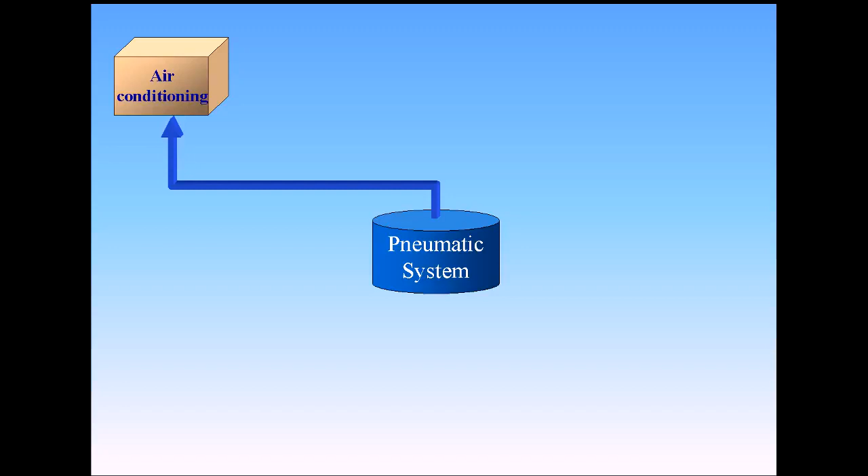The A320 pneumatic system supplies high-pressure air for air conditioning, wing anti-icing, water pressurization, hydraulic reservoir pressurization, and engine starting.

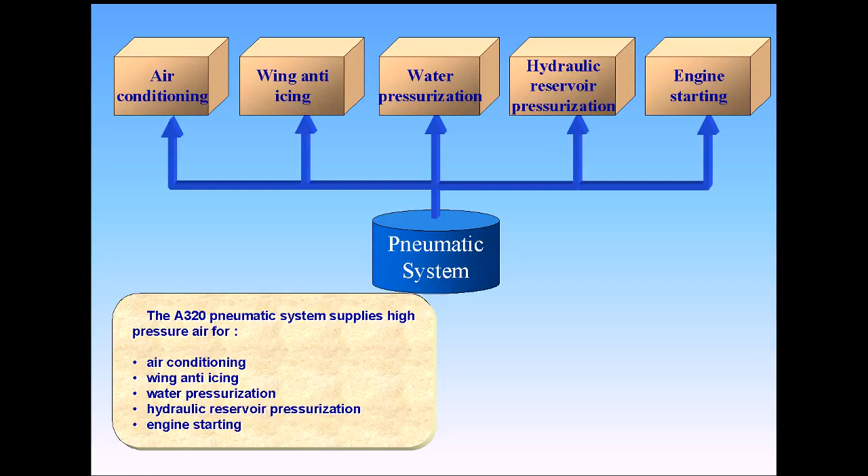High-pressure air can be supplied from three sources: the engine bleed system, the APU, and an external high-pressure ground power unit.

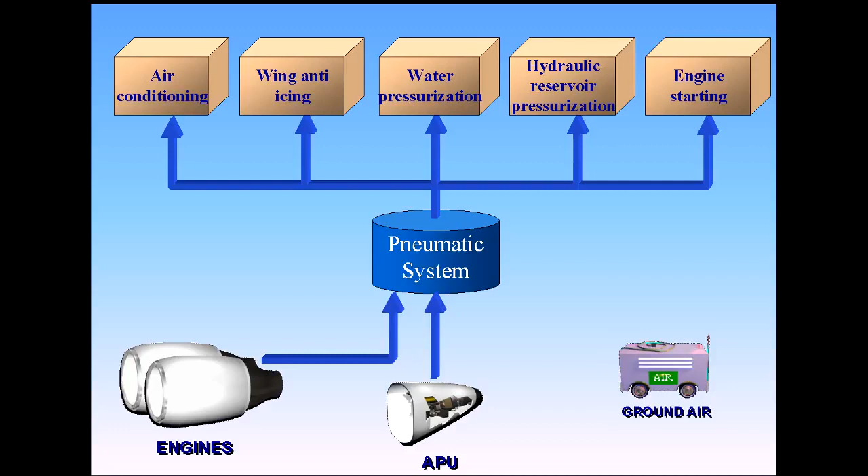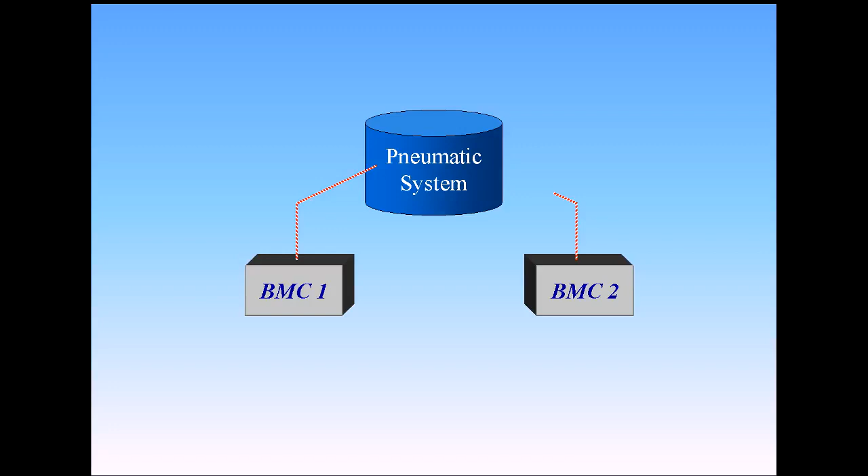The pneumatic system is controlled and monitored by two bleed monitoring computers, BMCs. There is one bleed monitoring computer for each engine bleed system. Both bleed monitoring computers are interconnected, and if one fails, the other takes over most of its functions.

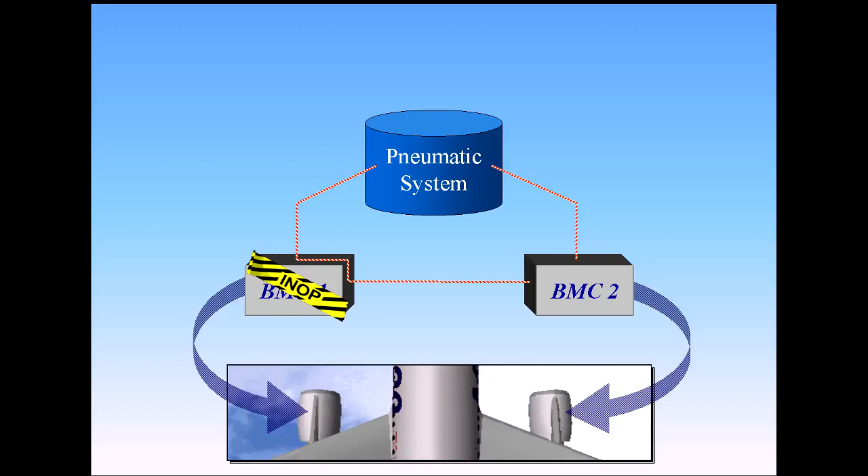There are air leakage detection loops installed in the vicinity of the hot air ducts in the fuselage, wings, and pylons. If a leak is detected, a signal is sent to the bleed monitoring computer, which automatically isolates the affected area. Bleed monitoring computer number 1 protects the left wing, number 1 engine, and the APU.

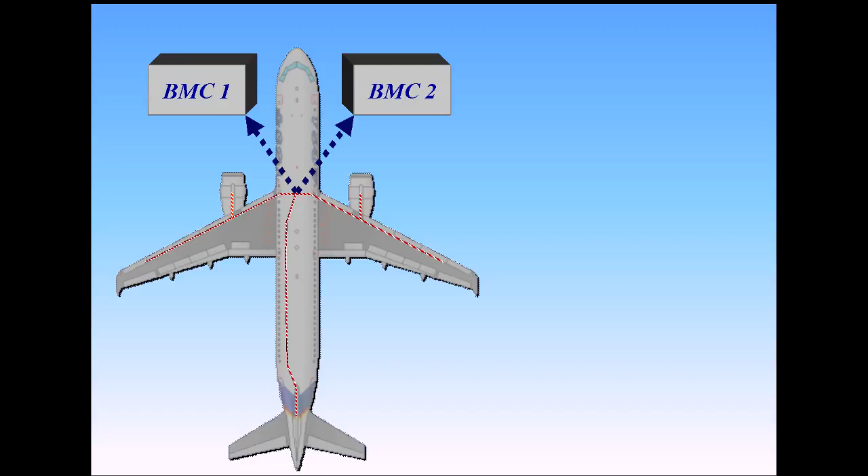Bleed monitoring computer number 2 protects the right wing and the number 2 engine. Should number 2 bleed monitoring computer fail, number 1 will take over all its functions, except for the pylon. Should number 1 fail, number 2 will protect all but the number 1 pylon and the APU.

Air is bled from two compressor stages of the engine: the intermediate pressure (IP) port and the high pressure (HP) port.

There is a high-pressure valve which can cut off bleed air from the high-pressure port. It is automatically controlled by the system.

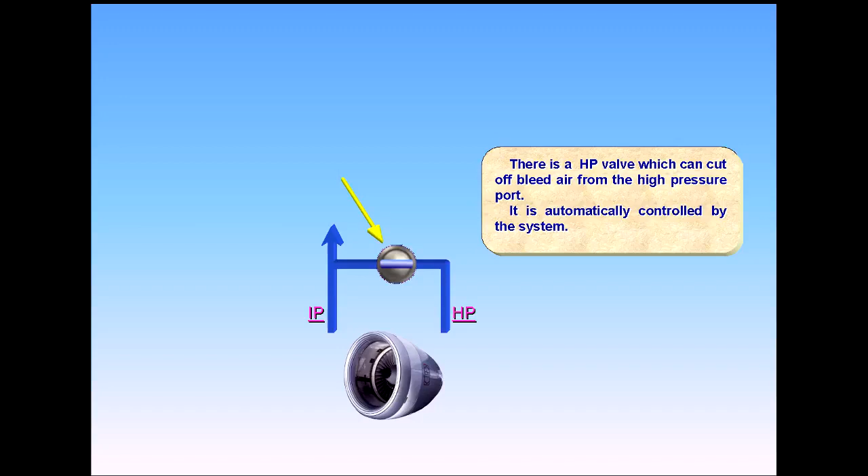The high-pressure section, HP, is only used when there is insufficient pressure from the intermediate output, IP, that is, when the engines are at idle. Once the engine speed is high enough, the IP intermediate pressure is sufficient and the high-pressure HP valve closes.

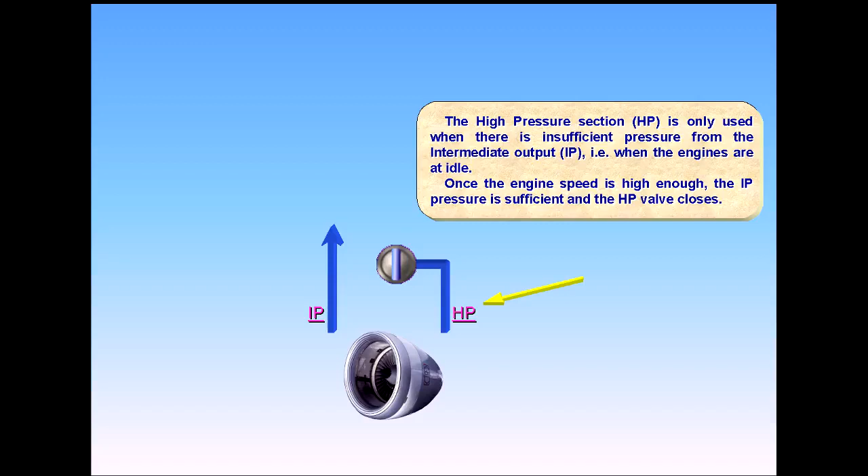The air extracted from the compressor then goes to a bleed valve, which acts as a shutoff and pressure regulating valve.

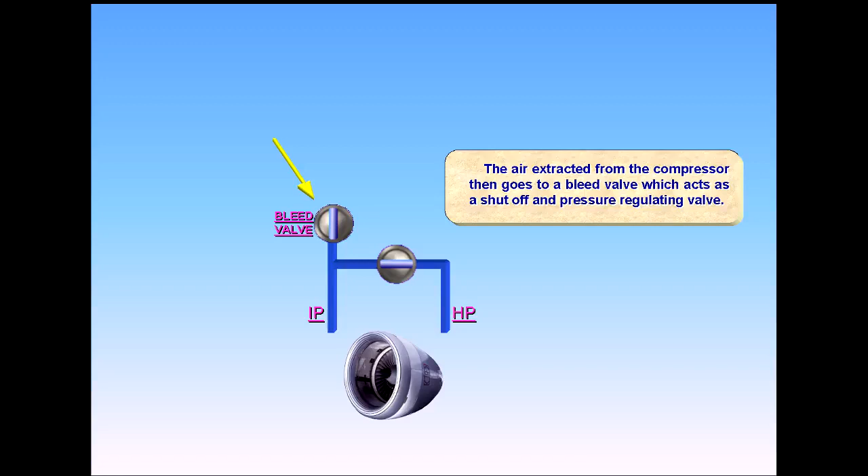Since the temperature of the bleed air is high, it passes through a pre-cooler before being distributed to the users. The pre-cooler uses cool air from the engine fan to regulate the temperature.

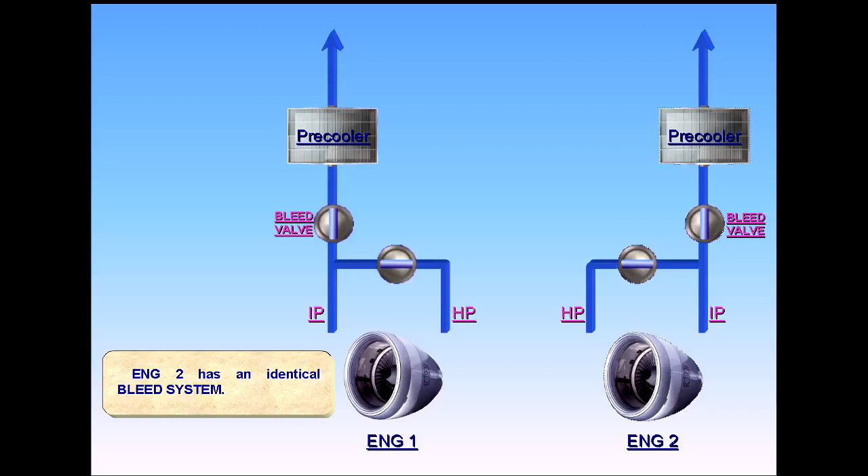Engine 2 has an identical bleed system. Both systems are connected by a cross-bleed duct. A cross-bleed valve permits their interconnection or isolation.

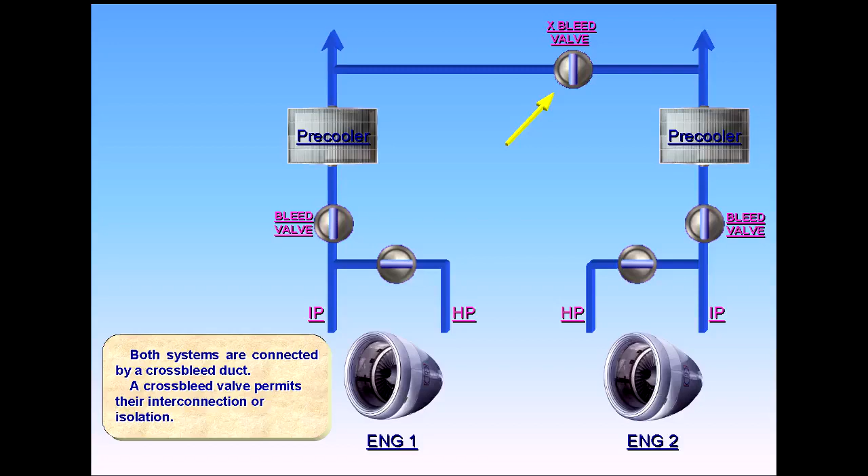The APU can also be used for bleed air supply. This is usually done on the ground for air conditioning and for engine start. However, APU bleed air is also available in flight.

APU bleed air is controlled by the APU bleed valve, which operates as a shutoff valve. Should the APU not be available, a high-pressure ground power unit can be connected.

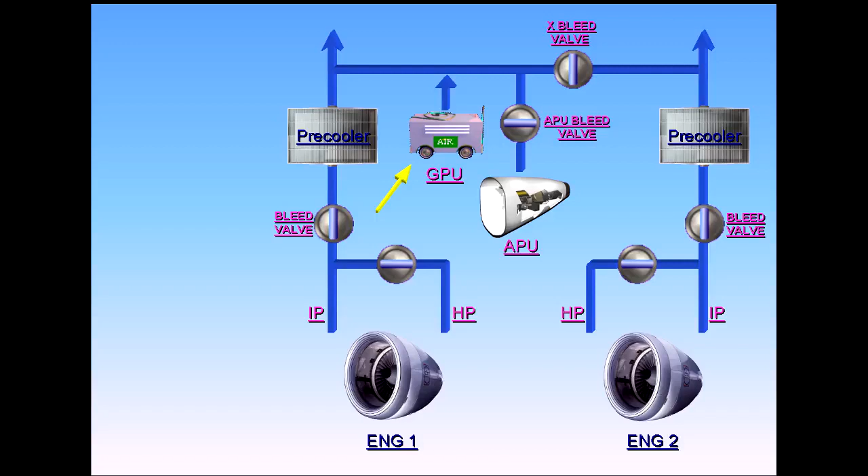This completes the pneumatic system. We will now show you how system information is displayed to the pilots.

Information on the pneumatic system is displayed on the lower part of the ECAM bleed page. Note, we have shaded the upper part of the ECAM bleed page because it is related to the air conditioning chapter. This will be covered in a later module.

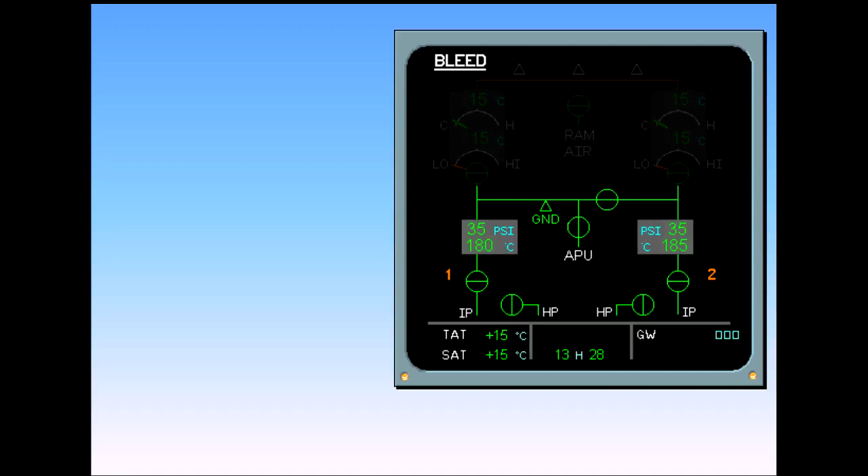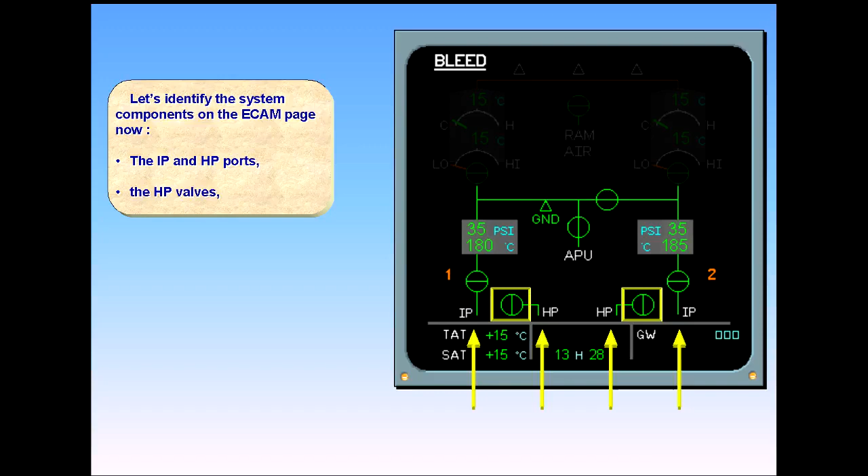Let's identify the system components on the ECAM page now: the intermediate pressure and high pressure ports, the high pressure valves, the engine bleed valves, the pre-coolers, the APU bleed valve, the cross-bleed valve, and the high-pressure ground connection.

The following information is also displayed: bleed air pressure, bleed air temperature, and engine identification numbers.

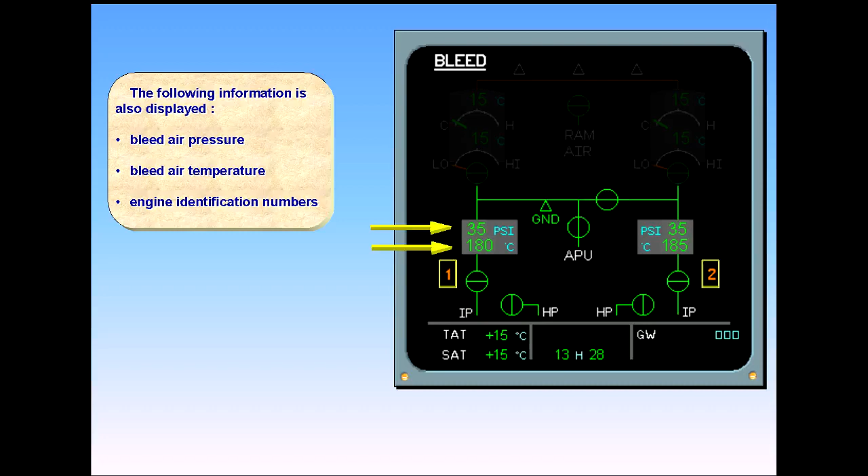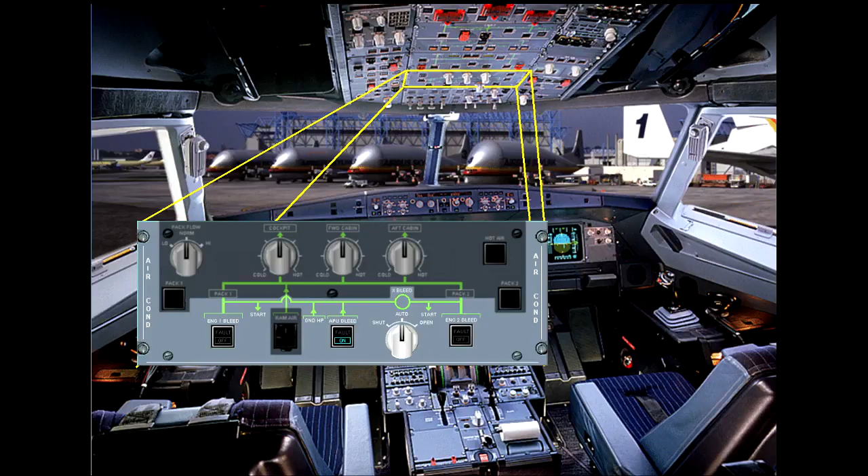Controls for the pneumatic system are part of the air conditioning panel, located on the overhead panel. Again, we have shaded those controls which belong to the air conditioning chapter.

Each engine bleed valve is controlled by its associated push-button switch on the air conditioning panel. The APU bleed valve is controlled by its associated switch. The cross-bleed selector enables the pilot to open and close the cross-bleed valve manually or to let the system operate the cross-bleed valve automatically.